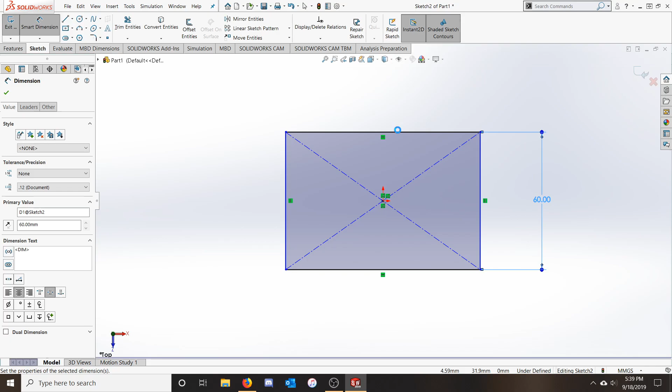Because it's always important to make sure that our sketches are fully defined, we're going to dimension this rectangle so that it is 60 units tall and 100 units wide. We can see that our sketch is fully defined based on the note down at the bottom of the screen.

So to begin our feature, we can go back up to the Features tab and select Extruded Boss Base. Since we're still in our sketch, SolidWorks begins creating a new extrude using that sketch. Let's take a minute to look over the options that we have. Up at the top of the menu, we have a From option with a drop-down box. We're going to leave this one for later.

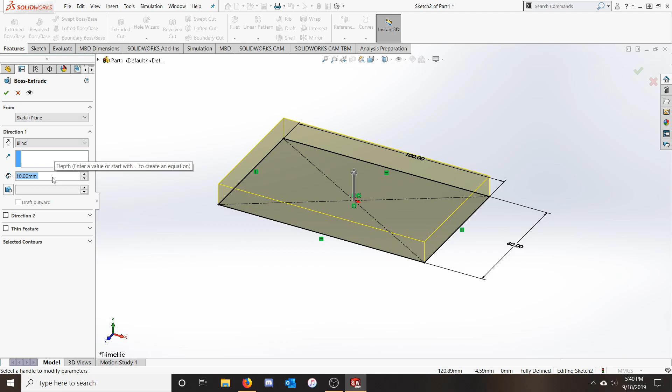Continuing down, we have Direction 1, which is currently set to Blind. A blind extrude just keeps going until it's gone the given distance, in this case 10 units. We can see that by modifying the distance, say to 40 units, changes the preview that we get in the graphics window. Cool, that looks about right. Let's hit our green checkbox, and we can finalize our extrude.

On occasion while modeling, you may want to modify some of the geometry that you created previously. Similar to sketches, features can also be edited. You can do this by right-clicking the feature that you want to change and selecting the Edit Feature option up at the top left of the context menu. While we're editing, let's look at some of the other end conditions that we have.

Instead of blind, we also have up to vertex, up to surface, offset from surface, up to body, and midplane. Let's see what midplane does for now, and we'll check out the others later. As we can see, midplane operates similar to blind, though with midplane it sets our extrude to straddle the plane that it's drawn on, so it goes half the distance up and half the distance down.

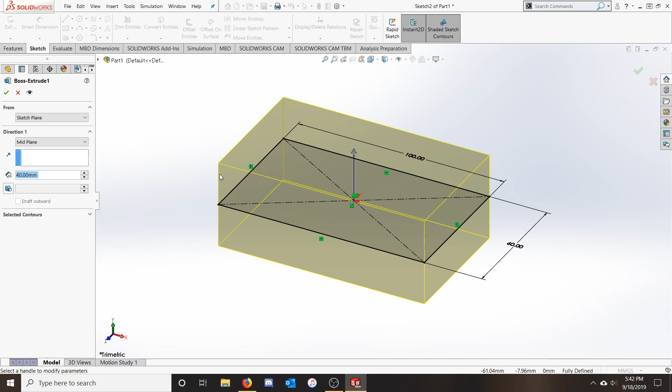Midplane is recommended if you're creating the first feature of your model with an extrude, as it often gives you more planes to use later on in the modeling process. This is especially useful when dealing with symmetrical objects, as it keeps the origin in the middle and keeps the plane centralized. Okay, so this looks pretty good. We'll hit the green checkbox once more, and we can continue on.

So, now that we have some solid geometry, let's do a quick refresher on how to navigate in SolidWorks. We can zoom in and out by scrolling on the mouse wheel, and we can orbit our part by click-dragging with the mouse wheel. Finally, we can pan by holding the Control key on the keyboard and click-dragging on the mouse wheel. If we ever get lost, we can use the Zoom to Fit option up on the Graphics toolbar.

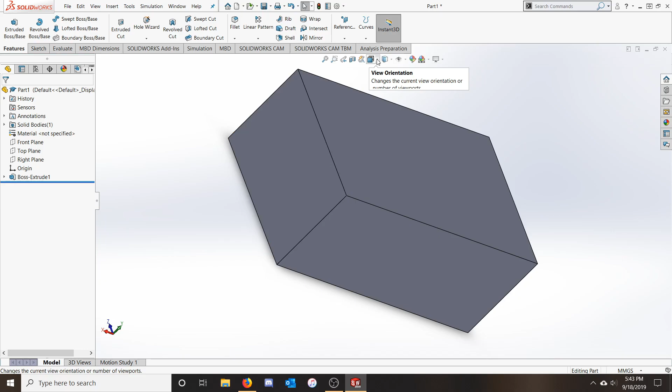In addition, we can return to our isometric view by hitting the drop-down option under View Orientation and selecting the isometric option from the drop-down here. If you're a hotkey person, Control 7 also brings you to the isometric view.

Another neat hotkey is Control 8. This functions if you've got a surface selected or are within a sketch, and it moves you to be normal to the profile that you have selected. One thing to keep in mind while you're modeling is that your part should match the orientation of the part that's been given.

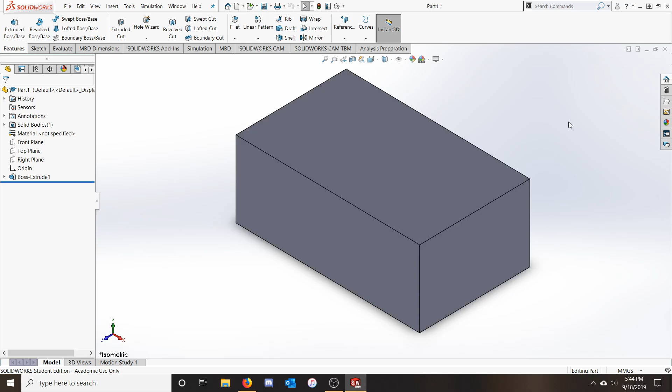I recommend frequently checking your own isometric view via the Control 7 trick to make sure that it matches the isometric of the given model.

Okay, so we have our brick. Let's make it a little bit more interesting. I want to carve out a hole to make it lighter, perhaps some kind of slot that goes from this right surface over to the left one. A lot of the features we cover in this class are going to have an inverse or a cut version. Extrude cut operates exactly the same as extrude, although it removes material instead of generating it.

So, where should we make our sketch? We can create a new sketch on any one of the three primary planes by selecting them from the design tree, or we can create a new sketch on any flat surface of the model. Let's use this right face here.

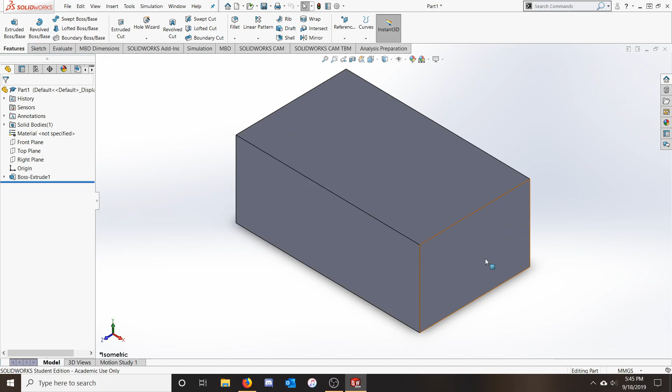Once again, to create a new sketch, you can left-click to select the surface, right-click, and select the Sketch option from the context menu. To make our view a little bit easier, we can hit the Control 8 hotkey to snap us to the normal to perspective.

So, now that we're here, let's draw our shape. I'm going to use the center point straight slot. This option lives under the Slot Sketch tool in the drop-down. Let's start our slot on the origin. We'll draw out the center line of the slot to be horizontal, and that looks about right.

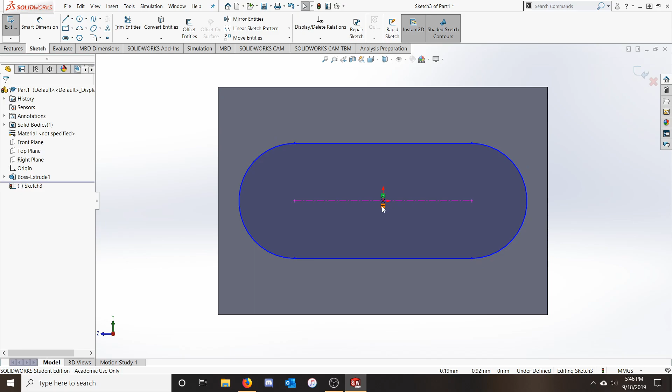Now, to fully define our shape, first we want the construction line in the middle to be horizontal. We can see that that one's been automatically added. And then from here, we can use our Smart Dimension tool to set the radius of one of our arcs to 10 units. And then we can set the distance between the two arcs to be equal to 30.

While we're here, let's look at some other ways to dimension between arcs. SolidWorks defaults to middle, but what if we want to dimension from extreme to extreme? Similar to how you can change a radius to a diameter, once you've created your dimension, we can clear our tools by hitting the Escape key, and then left-click on the leader of the dimension. Over here on the Properties toolbar, we can go to the Leaders option, and down at the bottom, we see that we have Arc Condition.

Center to center is the one that we want to use, but we can also set this to max, or to min, or any variation. Center to center is the one that I want to use, so we'll leave those options set and hit our green checkbox before continuing on.

So, now that our sketch is fully defined, how do we use it to cut through our first extrude? We can go back up to our Features tab, and this time select Extruded Cut. Now we have another question.

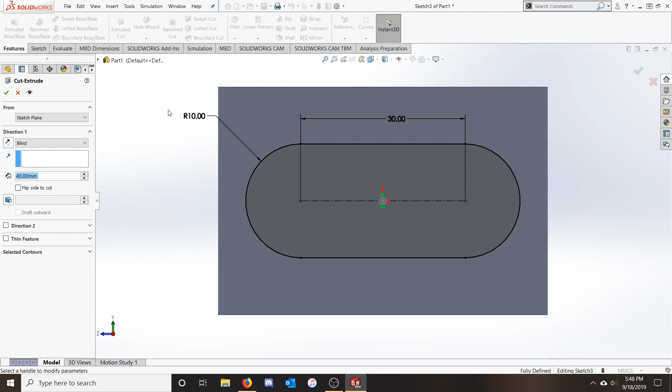How far along do we want to take our cut? Well, our brick is 100 units wide, so we can change our distance to 100 under the blind option, and that will make it so that our extrude goes all the way through.

However, what if in the future we want our brick to be wider? If the sketch for the initial brick is edited, but this extrude isn't also modified, then the cut is only going to go partway through the object, which is going to violate design intent. In addition, typing in 100 again is going to be reusing one of our dimensions, which also violates good design practice. Let's take a look at what other options we have under Direction 1.

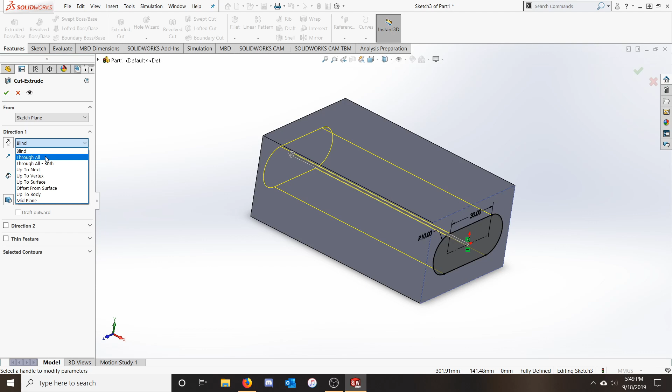This top option, Through All, sounds promising. Let's give that a shot. As the name would imply, Through All is going to take the extrude and bring it through the entire object. If we hit our green checkbox here, we can see that the extrude is going to cut all the way through the brick. This option works great whenever you have a hole that goes through the entire model, as it doesn't use any dimensions and it makes for a model that responds well to being modified.

If we go back into our extrude cut through the edit menu, we can see that there are also plenty of other options.

Extrude and extrude cut share a majority of their starting and ending conditions, so I would recommend experimenting with each of the different options and combinations to see what each pairing can do. While we're here, let's check out another option, flip side to cut.

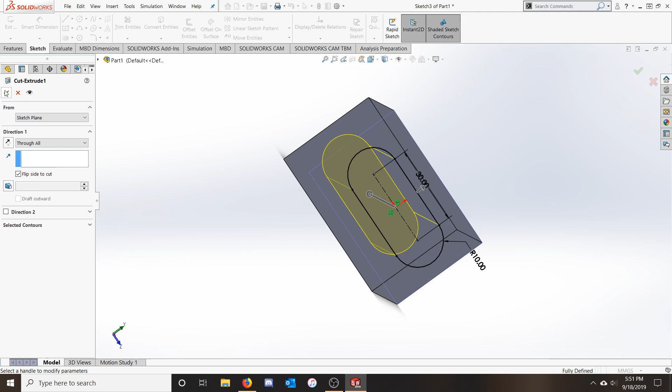If we select this checkbox and then hit our green checkbox once again, we can see the Extrude Cut feature now removes everything outside of the enclosed sketch. This can be a handy trick on occasion, but it's not what we want here, so we can undo our change and continue on.

Now, let's add a cylindrical peg that goes up through the middle of our model. I'm going to start by opening up a new sketch on our bottom surface, and then from here we can draw in our circle. I'm going to center it on our origin, and then we're going to draw it out to have a diameter of 20 units.

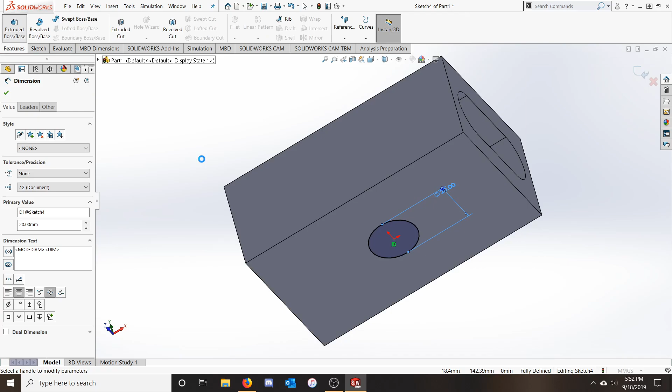Now that our sketch is fully defined, we can go back up to our Features tab and select the Extruded Boss Base option and take a look at what SolidWorks is going to be doing. In this case, the extrude is going to be trying to go down instead of up.

In order to fix this, we can hit the Reverse Direction option under Direction 1 to pop it into the correct orientation. We can see that the extrude is going to be overlapping with some of the geometry that we've already created. This is okay. SolidWorks does not double count material.

However, leaving it as a blind extrude and trying to calculate what the dimension is going to have to be would violate good design practice, so let's take a look at some of our other options. Once again, we have Through All, which is going to do the same thing that it did last time. In this case, that ought to do the trick, but let's take a look at some of the other options first.

Up to Surface and up to Vertex are going to continue the extrude until it has hit the selected surface or vertex, respectively. But there are some quirks to take note of here. You can select a surface or a vertex that doesn't intersect with our extrude.

So if we have this set to up to vertex, we can also choose this vertex here. If you do, SolidWorks continues until the selected vertex lies on the plane created by the surface at the end of the extrude. Similarly, if you choose a surface that doesn't directly cross paths with the extrude, SolidWorks is going to extend the surface until it does.

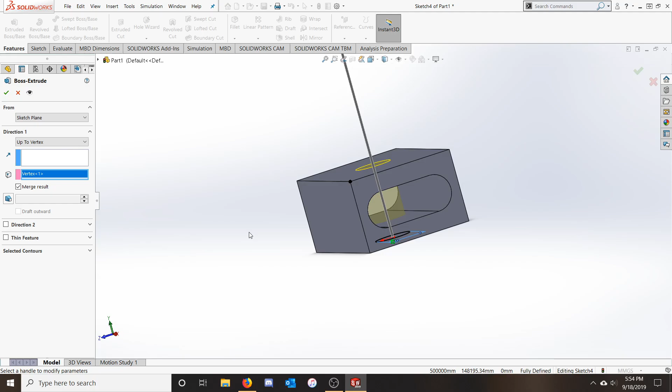Offset surface is the one that I really want to cover for now, so let's select that and take a look at what our options are. As you could guess, we need to select a surface that we want the offset to be measured from, and then we can apply a distance that we want the extrude to go from that offset.

In this case, let's type in a 50 here, and then we'll hit the reverse direction option to pop it so that it goes up to the surface and then 50 units further. Finally, we can hit our green checkbox, and we can see that SolidWorks generates the geometry, filling the peg through the brick. One thing to be careful of when making extrudes is to make sure that they merge properly.

We can see in our design tree that we only have a single solid body. This tells us that there is only one distinct part in the model. However, if we were to go back into our extrude and uncheck the Merge Results box, we can see that we now have two solid bodies.

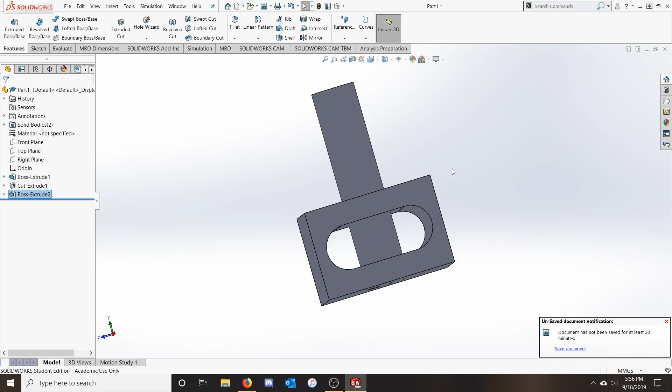One other hint that we have multiple solid bodies is that we have these graphical glitches where the cylinder emerges from our initial brick. For the purposes of this class, it's important to make sure that you only ever submit parts with one solid body.

You can also get multiple solid bodies by having disconnected features, like these two cylinders. This is okay if it's an intermediate step, say if you're adding a connective bridge between them later, but submitting any parts with multiple solid bodies will end up costing points on assignments and on exams.

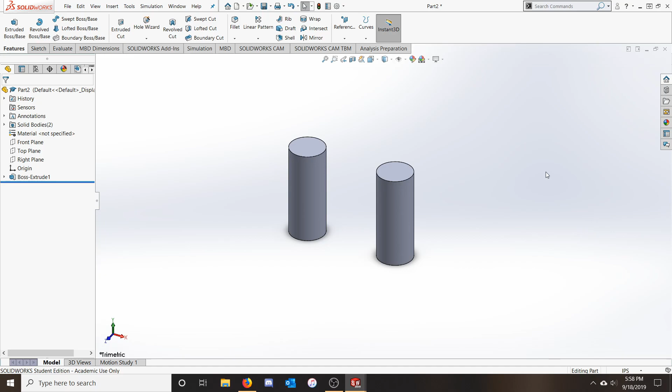Whenever you have multiple solid bodies, a good way to determine where the split happens is to go to the drop-down next to the solid bodies folder and highlight each of the different bodies. This will show us where the split has happened, and occasionally the names give us a hint as to which feature caused the split. Anyway, where do we want to go from here?

Let's add another shape coming off of the peg we've just created. However, the peg is cylindrical, so we can't sketch on it. We're going to have to be clever here. Let's draw our sketch on this front surface of the brick, and then we can extrude to start at the cylinder instead of the sketch plane.

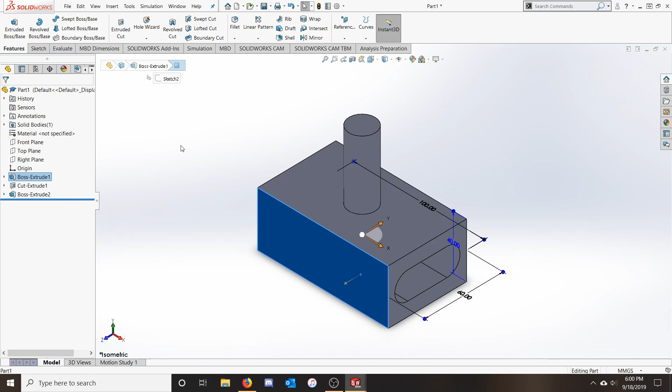In order to do this, I'm going to open up a new sketch on this front surface, but this time we're going to use the polygon tool to draw us a hexagon. As you can see, we can sketch outside of the bounds of the surface we selected as our sketch surface. SolidWorks interprets all surfaces and planes as infinite, meaning we can sketch wherever we'd like along this 2D plane. I generally like to produce my sketches out in space and then use my relations and dimensions to define them. This lowers the chance of accidentally creating geometric relations that I didn't intend for.

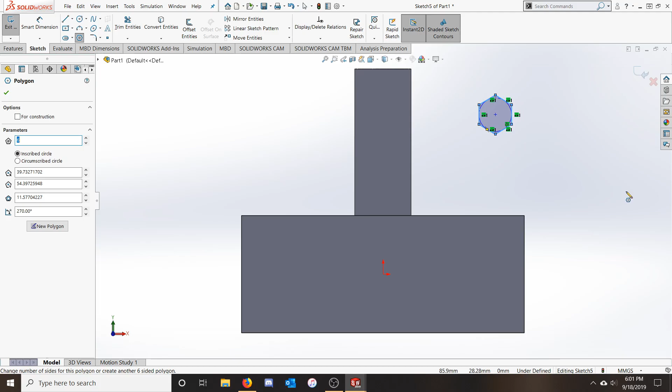So, to define this sketch, I want it centered, so we can use a vertical relation between the midpoint and our origin to pop it into the correct position. We can then define our hexagon as having a side-to-side distance of 15 units by using our Smart Dimension tool. Then we can align it so that the top point is vertical with our center point, locking its rotation. Finally, we can dimension this bottom point here to be 40 units up from our origin to fully define our sketch.

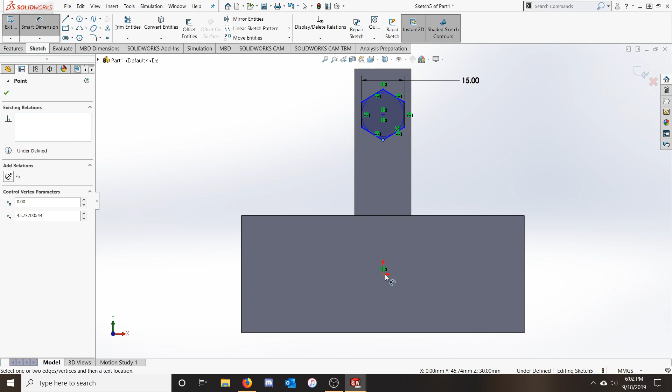Now that we're done with that, we can go back up to our Features tab, select Extruded Boss Base, and take a quick look at what it is that we've got. This time, instead of using the Sketch Plane as our From option, we're going to select the Surface Face Plane instead. For this, we're going to need to choose a surface, so I'm going to select the cylinder, and we can see that we get some strange things happening at the other end of our extrude.

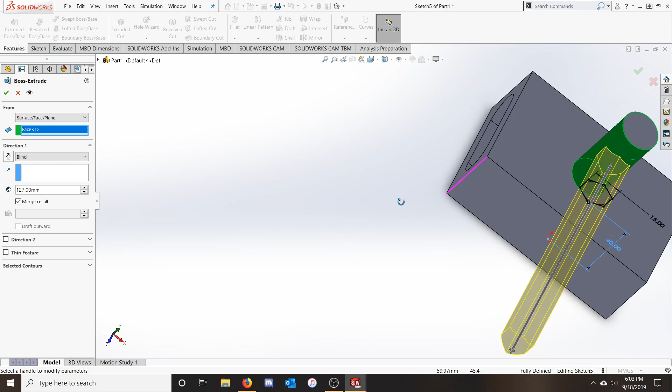Whenever you use Surface Face Plane as your starting condition, SolidWorks makes the end of the extrude match the curvature and orientation of the starting surface, which gives us this interesting effect. In this case, though, I don't really want that curvature, so let's explore some of our other options.

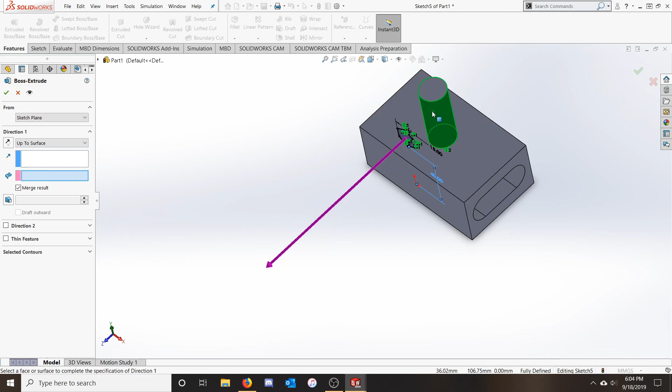In this case, instead of starting our extrude at the peg, we're going to end it there. In order to do this, we can change our From surface face plane back to sketch plane, and then change our Direction 1 from blind to up to surface. From here, we select the surface that we want to act as our terminating surface to set the extrude to go up until it hits our peg.

Another option that we have is instead of up to surface, we can use up to next. Up to next continues until the extrude has reached a surface that fully blocks the extrude path, while up to surface requires user input. In this case, they're effectively the same option, but up to next can get you there a little bit faster.

One other option that we can show off with this extrude is instead of having the starting condition set to sketch plane, we can set it to offset. This is going to work similarly to having the offset end condition, but in this case we're changing where the extrude starts instead of where it ends. I'm going to set it to have an offset of 5 units, and we're going to reverse the direction so that it starts a little bit closer to our initial peg.

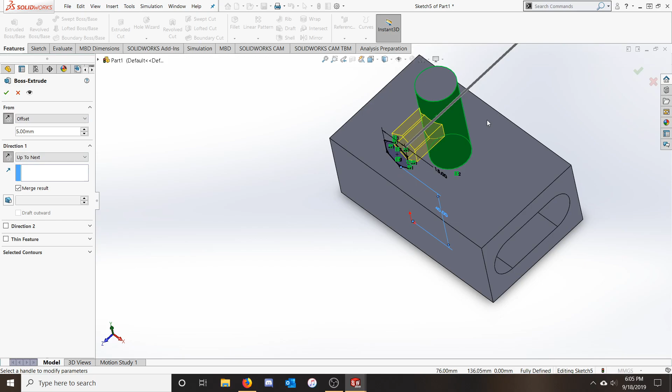The next bit of extrude that I would like to cover is the draft option. This option allows us to have our extrude expand or shrink as it continues, and can be activated by selecting this button. As you can see, increasing the draft angle is going to make it so that our extrude shrinks faster and faster as it approaches its end condition.

We can flip this around by checking the draft outwards box. This makes the profile grow instead of shrinking. Do be careful though, as if the draft angle is too high, the cylinder is no longer going to fully block the path of the extrude, breaking our end condition.

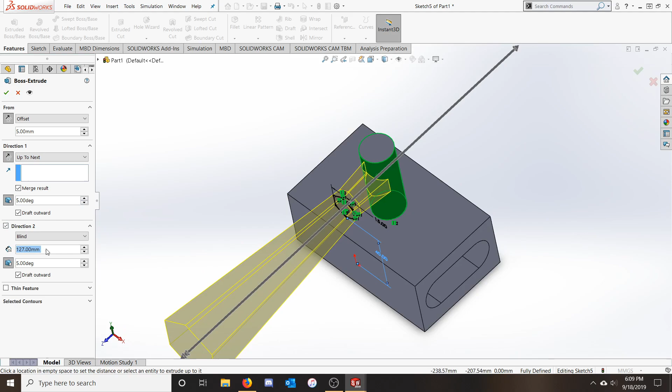One other interesting thing that can be done with drafts comes into play when we activate Direction 2. Checking the Direction 2 box allows us to reuse the same sketch and starting conditions to create another extrude going in the opposite direction. We can choose new end conditions for this extrude, and we can also change the draft information. Direction 2 can also be used without having the draft active. You can deactivate the draft option by once again selecting the draft button.

Now that we've got all of that sorted, we can hit our green checkbox to finalize our extrude and take a look at what it is that we've made. Well, the end result isn't as valuable as the things that we've learned along the way.

However, while we're here, let's show off some additional sketch tools. First off, I want to show off Convert Entities. This tool allows you to copy something from your model onto the current sketch plane.

As an example, let's open a new sketch on this surface here. Now that we have that, let's select this front surface and select Convert Entities, and we can see that it copies the shape up into our current sketch. With Convert Entities selected, we can also bring over individual edges, such as this one here.

One of my favorite features of Convert Entities is that you can use it to project an entire sketch onto the current sketch plane. You can do this by selecting the sketch from the design tree. You may need to reveal it by hitting the drop-down next to its feature, and then selecting the sketch. From here we can select the Convert Entities option, and it will pop the entire thing into the current sketch plane.

Another useful sketch tool is Offset Entities, which does exactly as it says on the tin. It allows you to create a new loop or sketch entity based on a given sketch entity and some offset distance. We can change the direction that it's offsetting by hitting the reverse box, and we can change the distance by modifying this numerical value here.

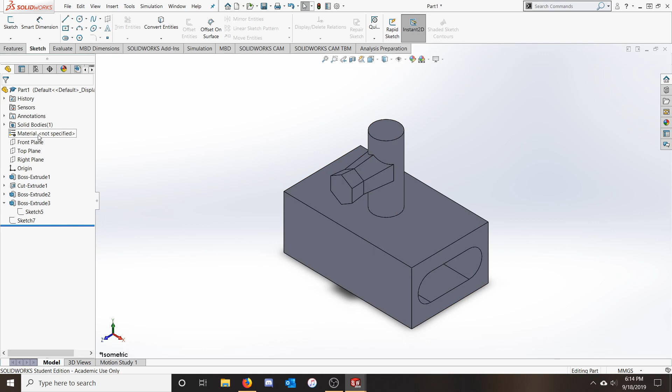Finally, objects are usually made out of some form of material, and SolidWorks allows us to define a material for our model. We can do this by right-clicking on the Material option in our design tree, and then selecting from the menu here. If you don't see a material that you like, we can select the Edit Material option to bring up SolidWorks' entire material database.

There are many benefits to choosing a material for your SolidWorks model, but one of the main ones is that using a material is going to allow us to find the mass of our part if it were to be made of that material. Oftentimes, in your homework assignment, we're going to give you a mass value to compare your model to.

This is for your benefit only. We do not grade the models based on the mass. It does, however, allow you to get an idea as to how close your model is to the one that's given in the assignment.

You can measure the mass of your model by going to the Evaluate tab up on the ribbon, and then selecting Mass Properties. We can find our mass value here on the pop-up, and we can change the number of significant figures that it gives us by selecting the Options tab and setting it to use custom settings.

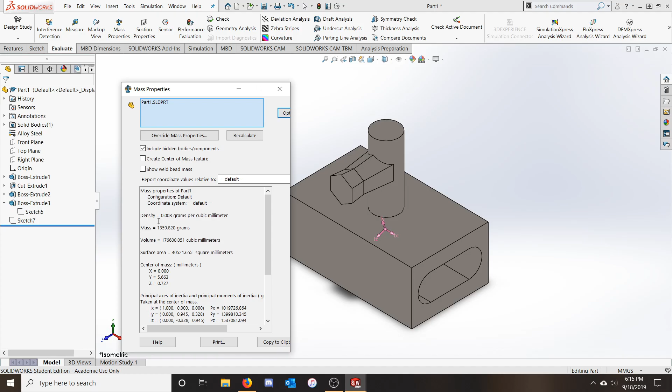You're always going to want to make sure that your mass matches the given mass to the given precision. So if we give you the mass at 3 decimal points, make sure that your mass, when set to have 3 decimals of accuracy, matches the one that we give you.